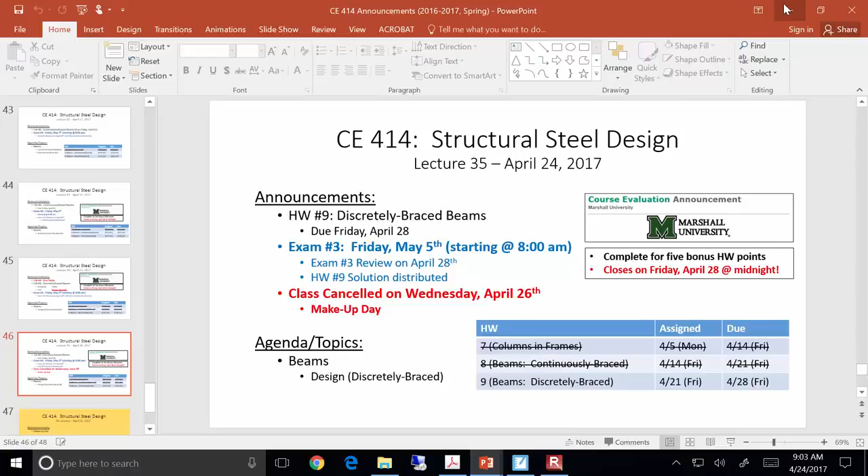Okay, so before we get back into our final example, or what is essentially our final example, I want to briefly go through the solution for homework 8. If you just came in, I was handing out homework 8s earlier. I can hand yours out after class, so if you don't have yours, don't worry. Just come see me after class.

1, 2, 3, 4. 1, 2, 3, 4, 5, 6, 7, 8. There's that. And then there's that. Okay.

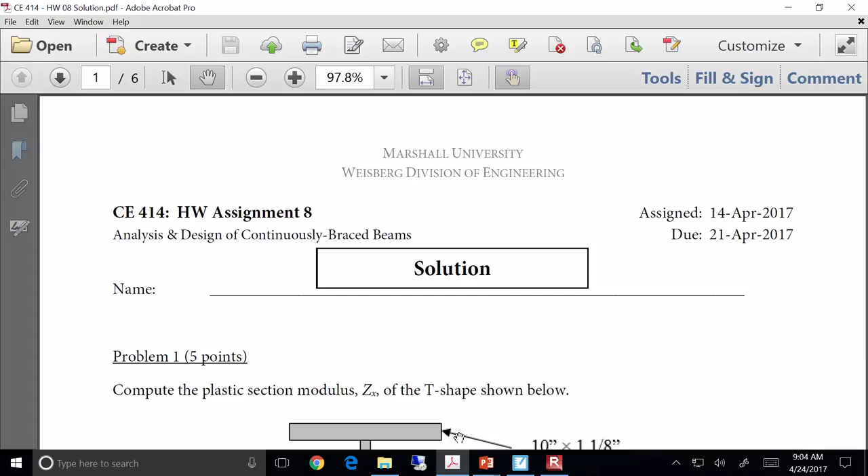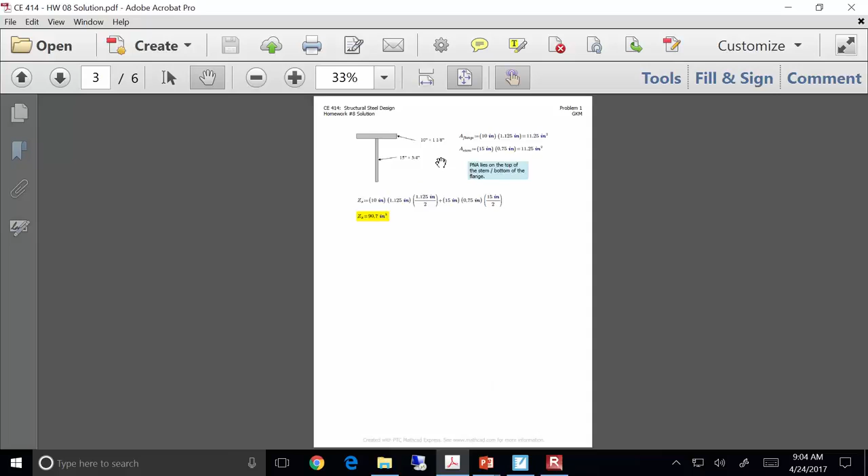So on this particular homework assignment, I think it was a pretty straightforward assignment. The one thing that probably gave everybody some hiccups was either the algebra on problem 2, or some of the load distribution stuff on problem 3. So let me go through problem 1 first. I think problem 1 was a little bit of a trick question, but if you look, the area of the flange was 11.25 square inches, and the area of the stem was also 11.25 square inches.

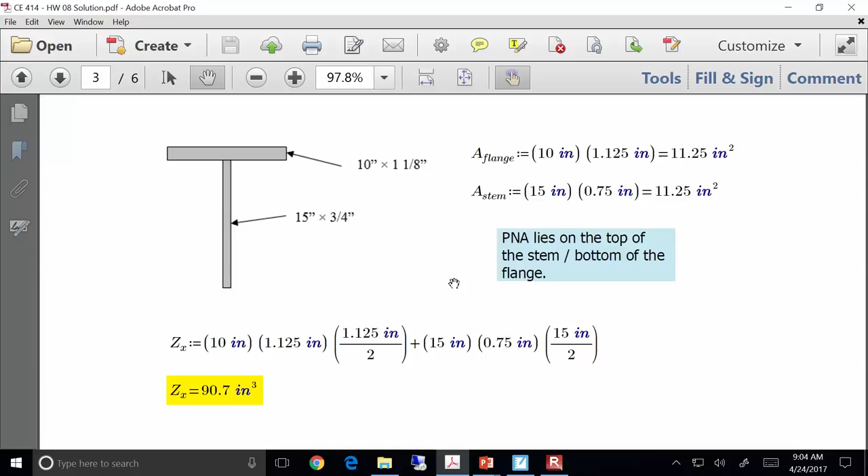So where's the plastic neutral axis? It's right there, right where the two points meet. So literally just taking moments about that point, you should have gotten a ZX of about 90.7 cubic inches.

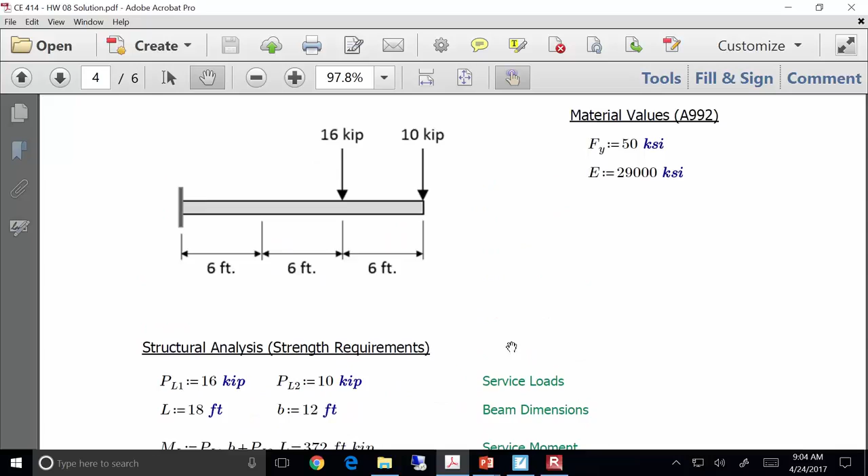And that's about it. On problem 2, let me show you what I did. So first off, for the moment, it's literally just each point load times its distance from the support. So you should have got a factored moment of 595.2 foot kips. Keep in mind your moment needs to be factored. For deflections, though, you do not apply load factors.

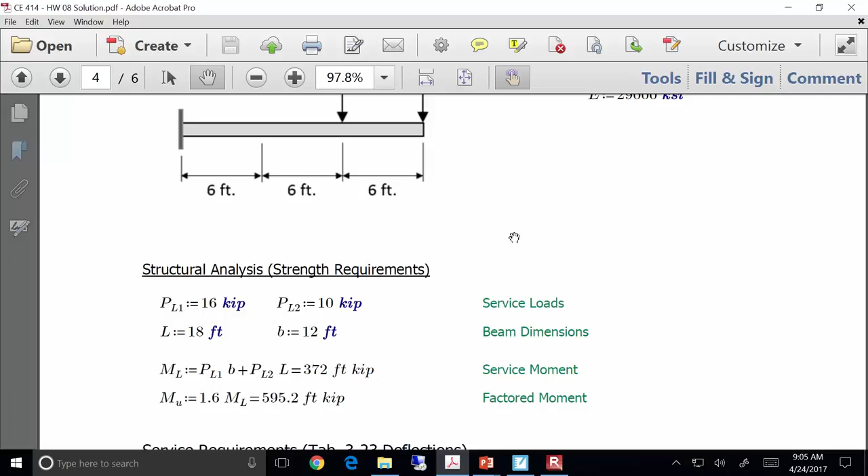Now, this is how I did it. Let me show you something. Okay, watch this. I think this makes the algebra a little easier, so I want everybody to pay attention to this. This is the deflection for the first live load, the one that's not on the very end, the 16 kips. This is the formula for the deflection for the 16 kips. Now, it's a bunch of junk, but it's a function of Ix, and you're trying to solve for Ix.

So watch this. If I factor out Ix, I get this pile of junk times 1 over Ix. Is everybody okay with that? So if I calculate all of this, I get about 961, and that's inches to the 5th, because if you divide that by a moment of inertia, that's where your inches comes into play.

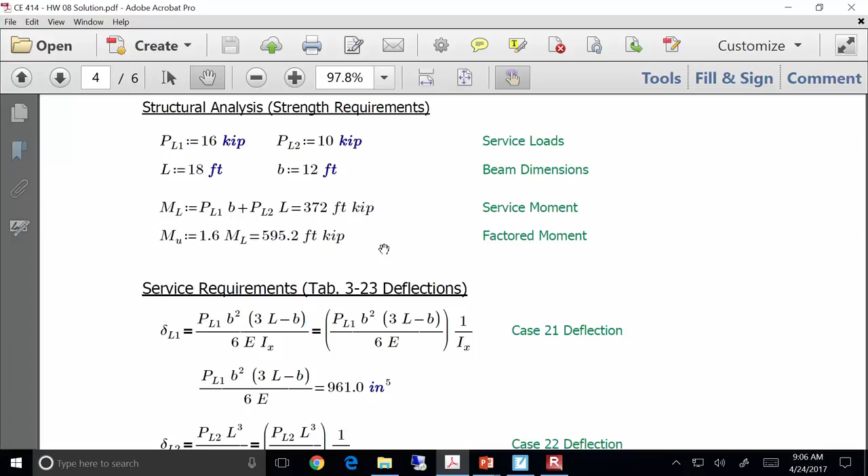For case 22, for that point load deflection at the end, that's where I get PL cubed over 3EI, and I get this. So if I add these two up, it's essentially just this over Ix plus that over Ix. So add those two up, and your maximum deflection has to be less than or equal to that over Ix. Just solve for Ix, and you get about 5,887. I think that's a lot easier, a lot less algebra.

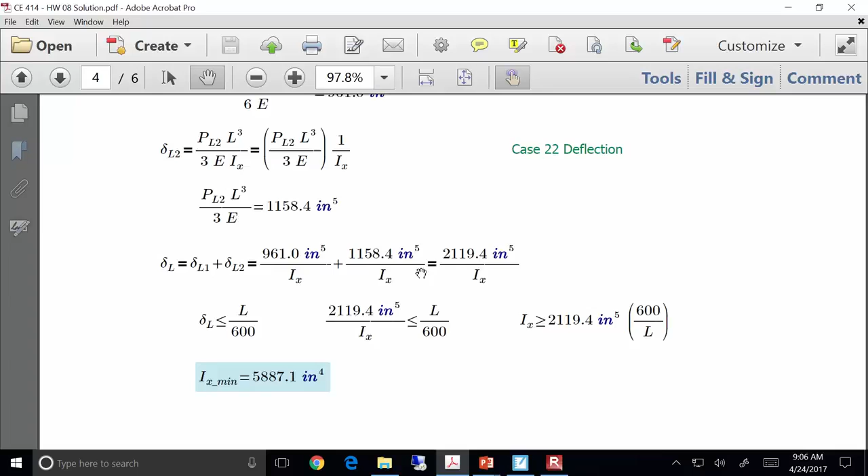So when you go into member selection, you have to select a member that has a maximum moment capacity of 595 foot kips and a moment of inertia of 5887. Now, if you select based off the ZX charts, you can select a 21 by 68, and it has enough moment capacity, but it doesn't have enough of a required moment of inertia.

So you go to table 3.3, pick the first section that works, which is the W33 by 118, then go back and check its capacity, and you've got more than enough. So your answer should have been a W33 by 118.

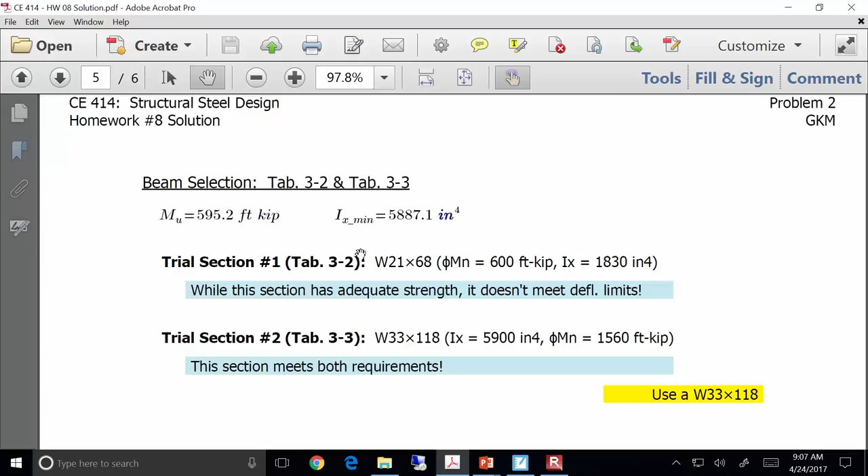As for problem 3, okay, so here's the problem. Now, unit weight of concrete is 150 pounds per cubic foot, or 0.15 kips per cubic foot. So let's take a look at the structural analysis. So first up, we've got the assumed beam self-weight of 100 pounds per foot.

Now, the area, I think we've discussed this in concrete design, and I know for those of you that haven't had concrete design in a while, you have done this. To determine the self-weight of that slab, you take the unit weight times the area, okay?

So what's the area of the slab? Well, it's the thickness times the tributary width. The tributary width is 8 feet. So 8 feet times 5 inches, you should have gotten 3.33 square feet. So gamma times the area will give you a dead load. So the slab weighs 500 pounds per foot.

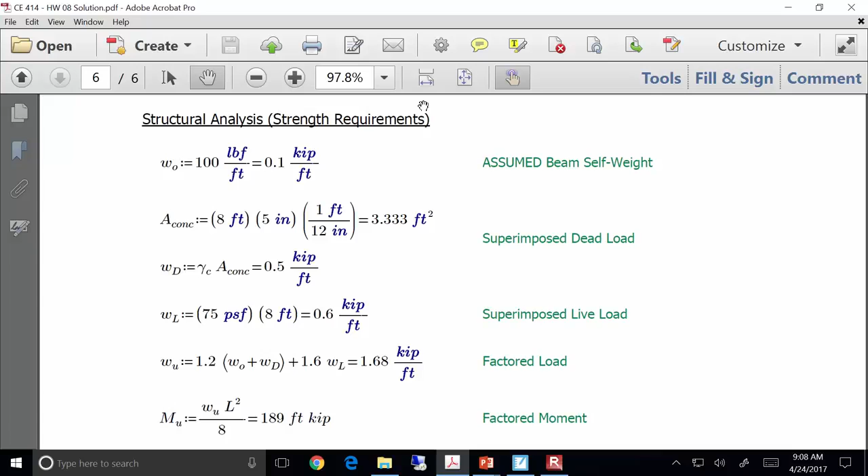The beam weighs 100 pounds per foot. So 1.2 dead plus 1.6 live, you should have got a factored load of about 1.68 kips per foot. Again, for your live load, just take the pressure load times the tributary width. So your moment should have been WL squared over 8. That was 189 foot kips.

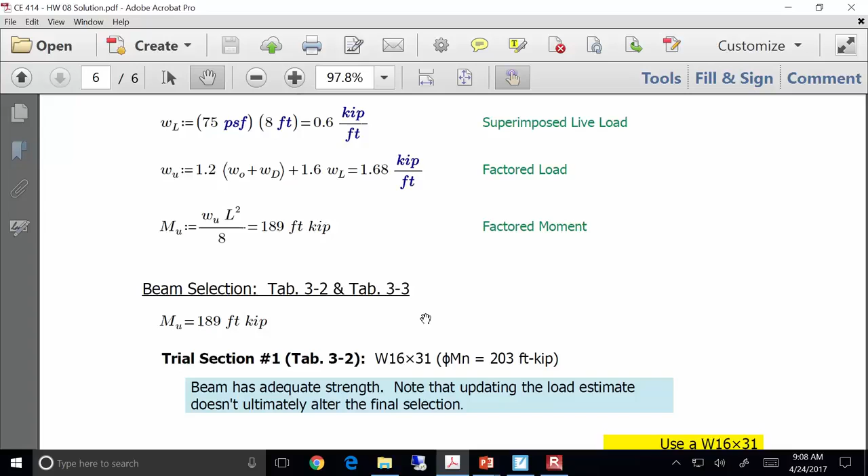So selecting a section, you should have gotten W16 by 31. It has adequate strength, and if you go back and update the load estimate, because this beam is lighter, you still don't get economy. If you remember, on one of the examples we did in class, we assumed a beam self-weight that was heavier, so we went back and updated the moments, and we found that we could actually pick a smaller section. That isn't the case here. It ends up still being the 16 by 31. So the 16 by 31 is your answer.

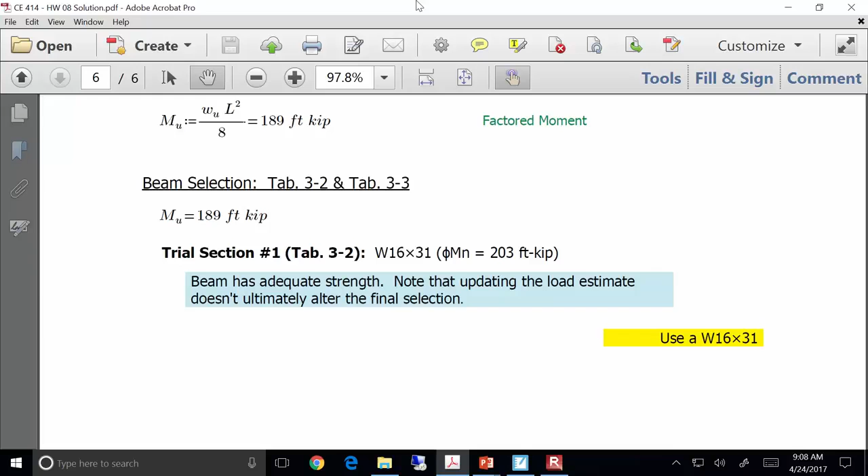Anybody have any questions on that? Yes. Yes.

However you get that, whatever you feel comfortable with. I mean, there's probably 7 or 8 different ways of doing that problem that are all correct. It's really more about what you're most comfortable with. Some of you are going to be more comfortable just hitting solve on your calculators. Some of you aren't. I recommend just doing what's comfortable, honestly. I'll say this.

This problem is more, I would say, computationally intense than what you would see on a final. I'm not an algebra guy on the final. That's not what I'm trying to get you all to do. I'm trying to get you all to do the structural design. So this was more intense than what you would get on the final. Sound good? Any questions? Okay. All right.

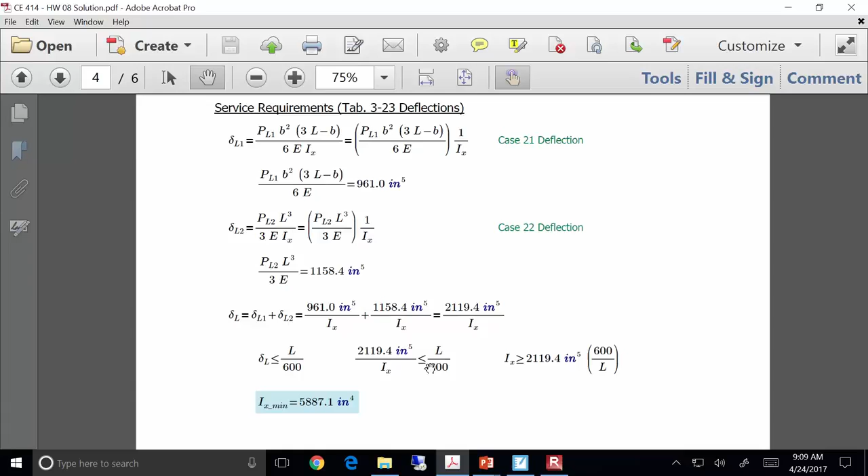If that's the case, then let's get into, let's sort of finish out our final example for the semester, which is this one. So let's just get back into the swing of things and make sure everybody's clear on where we're at and where we're headed.

So if you recall, we were discussing discretely braced beams as opposed to continuously braced beams. We know that unlike continuously braced beams, discretely braced beams want to buckle, okay? And their buckling capacity is a function of 2 things: how far apart your braces are, and your moment gradient. Assuming you've got a shape and you know all the material properties, you need to know how far apart your braces are and what your CB value is.

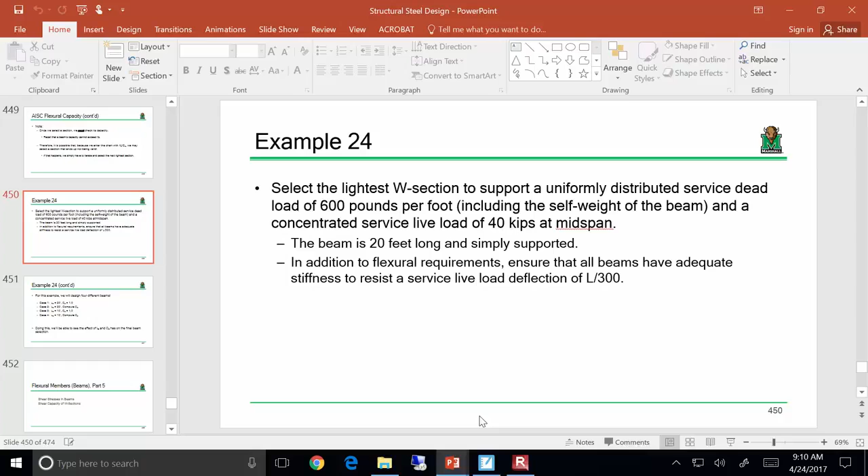So we're doing this example 24, where we're doing a fair amount of design, and the idea is that I want to give you all a lot of practice on determining whether or not a given section has adequate capacity. So my big goal is that you all understand how to navigate the beam charts. Now, we did example, or case 1, where we had CB equals 1, and then we looked up a section, and it was pretty straightforward. And that's really what case 1 was all about: just trying to ensure that you all can navigate the beam charts.

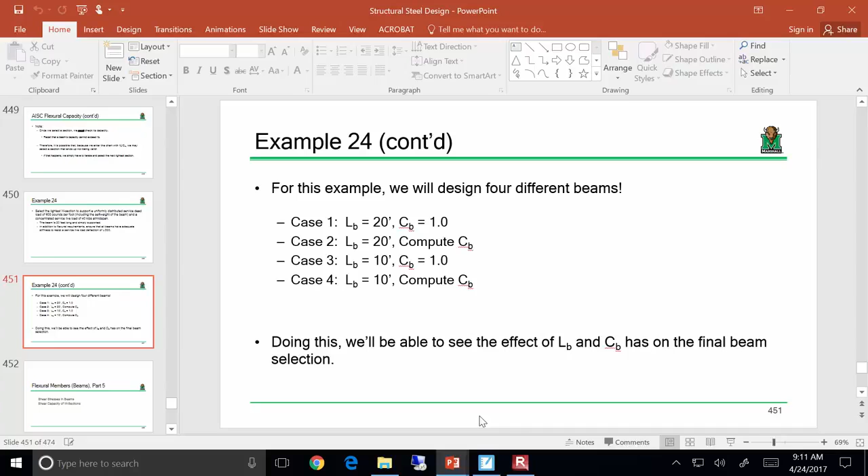Case 2 was a little more involved. We had to compute CB and then adjust our moments accordingly. So let me go back to the example problem. So here was the example problem. Let me go back one.

So here's case one. We have a CB of 1, so we just calculated our Mu, got 356 foot kips, solved, and we got a W16 by 67.

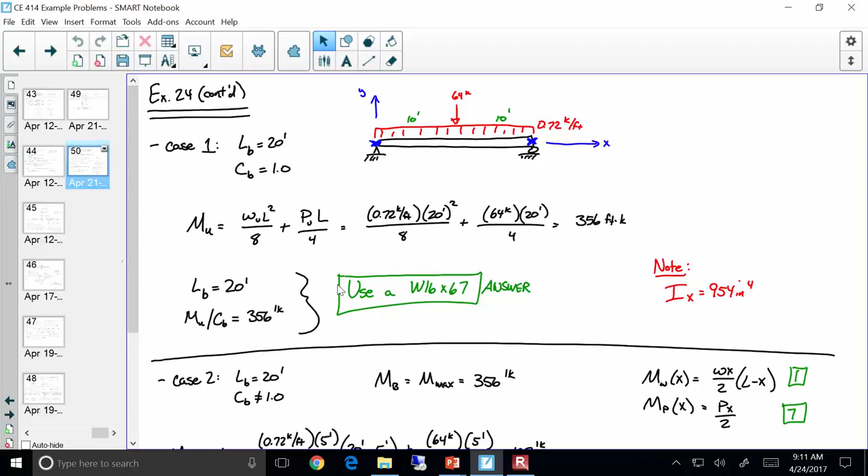Now for case two was a little more laborious because we had to go through and compute MA and MC. We knew MB and MMax were the 356 foot kips, but MA and MC we had to compute, using these expressions here.

Okay with that? Now we got a CB value of about 1.295. So we divided that out. We got an MU over CB of about 275 and an LB of 20, and we got a trial shape of a W14 by 61.

Was everybody okay with being able to locate that W14 by 61? Everybody okay with that? Okay.

Now, I say that's a trial shape for a very specific reason. In order to find this shape within the manual, we adjusted our moments by CB. As you know, whatever CB is, it doesn't matter - your capacity is cut off at MP. So it's very possible we could get what I'd describe as a false positive - a member that looks good but actually isn't.

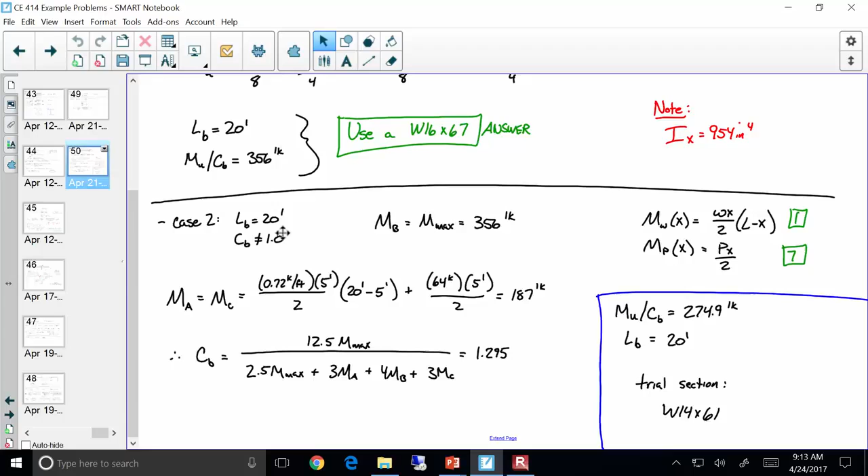So whenever you have a CB that's not 1 or greater than 1, you need to go through and check your section. So this is where we left off last time. Let's go through and analyze this shape - a W14 by 61. So what we need to do is go to the ZX tables and look up some properties.

For a W14 by 61. Now, it is very possible that's not a bold shape, and that's fine because the bold shapes are based solely off of ZX, but in the buckling realm, that might not match.

So let's start off - has everybody been able to find the W14 by 61? Is it a bold section or not? No, okay - again, that's very possible. So what page is everybody on? 325, okay, so you're on the fourth group down.

Now, the first thing we need in order to analyze this section is LP and LR. So what is LP and LR for this section going to be? Feet. And LR is...

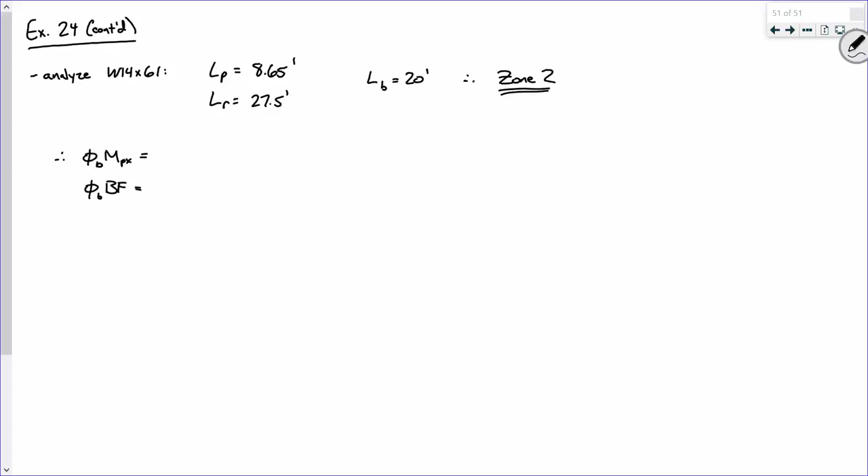And what's phi BF? Okay, everybody okay on that?

Now, I want to make an observation that might not make a whole lot of sense right now, but it will later. Okay, so phi MP is 383, right? What is our maximum moment, Mu, for this section? So it was 356, right? Mu is 356, right? So phi MP is bigger than that, right? I want you to just keep that in the back of your head, okay?

Now, while we're at it, before we do any other math, just keep that relationship in the back of your head. Now, what is Ix for this section?

And are we okay with that value? Yes, because that value is larger than our Ix min. So is everybody okay with that?

I know it's been a while, but everybody good? Remember, what was our Ix min? 490 something, yeah, okay.

All right, so in order to analyze this section, in order to determine phi Mn, it is the minimum of the following quantities: CB times phi MP minus phi BF times LB minus LP, or phi MP.

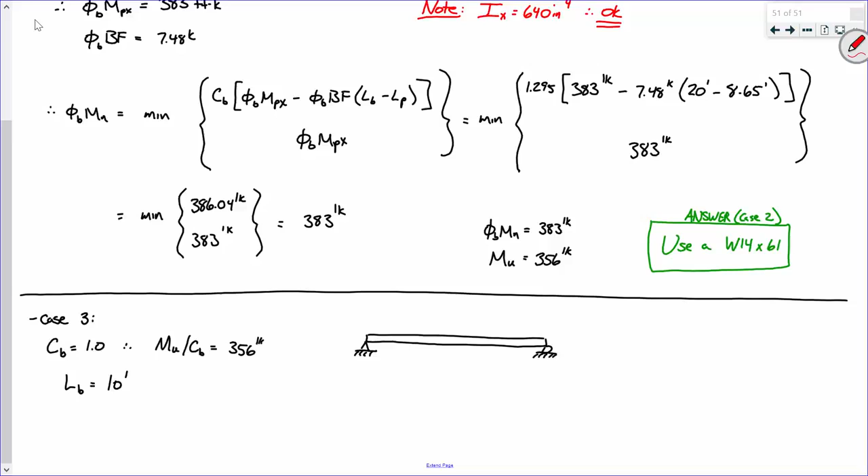This is important. So here was our beam before. We had this. Excuse me, we had this. And we had this, right? And this was 10 feet, and this was 10 feet. This was WU, this was PU. All right, everybody okay with that?

Now, last time, all we had was a brace here and a brace here, right? So last time, what we had was MA, MB, MC, and then M max happened to be right there, right? Now we have a brace right there. So is that center point still MB? No. Now what we're going to have is MA, MB, MC, and M max. Everybody see that? Yes.

For case 4, I'm making the point for later. No, I know what you're saying, but my point is later, I want you all to understand that we can't use, like when we do case 4, we can't use the C sub B value from before. We can't use that, what was it, 1.295? We can't use that from before because we have a different spacing configuration. We're going to have to go back to those moment expressions that we calculated before and do a little bit more work.

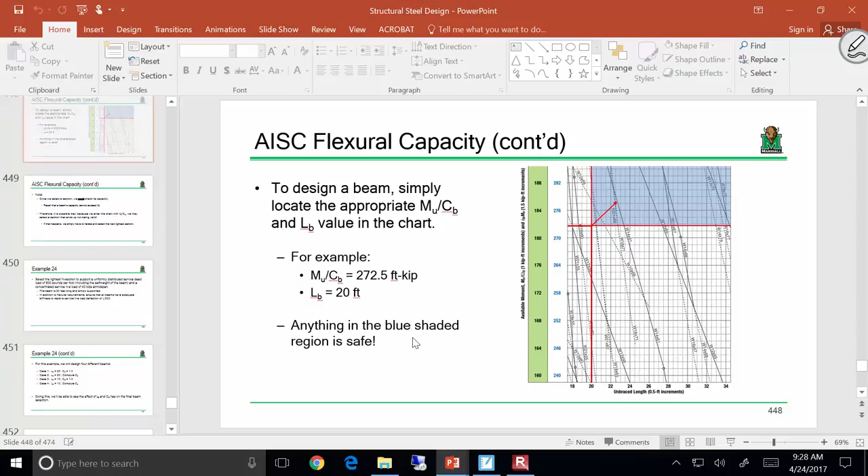I'd say it really doesn't matter, you can go either way. Really what you're trying to do is this - let me show you, it'd be easier if I pulled up the image. So you're finding that particular point, and anything in the blue region is safe, indicating a section with larger moment capacity and larger unbraced length. So let's say here's your point.

Now can you see that's a W14 by 61? Whether you go right and find the W14 by 61 or go up, it's still going to be the same line. I would argue doing it that way.

The reason why is because more than likely you're going to have the shortest distance. It's possible that on some of these charts, and this can get a little frustrating, you find your point and go like that, but if you go up you have to go to the previous page, so you're having to go to different pages to find your section. So I would just do your best to find the shortest distance to your nearest section without turning the page. Sometimes you have to, there's no other way around it. Does that answer your question? Yeah.

It's possible but rare. Let me say this - what happens in case 4 might throw a new wrinkle into the mix, but we'll get to that in a second. Just bear with me on that.

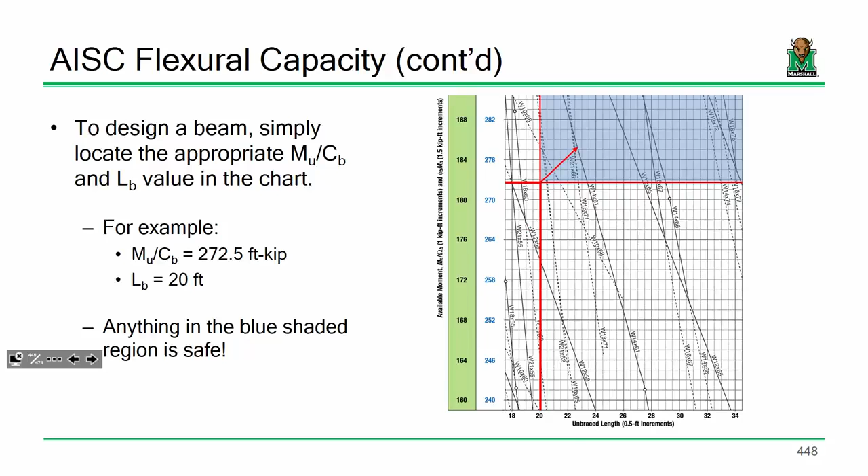Now what was the moment of inertia of this section, the W18 by 55? Did anybody look that up? 890. So I'll put a note: IX is 890 inches to the 4th. That's okay, right? Because remember, no matter what, we had to pick a section that was over 490... 497. Okay, all right, now look at this.

What happened? It got deeper, but it got lighter. Now why? Well, because we threw another brace in there. Throwing another brace in there means increased buckling capacity - you're taking that unbraced length and making it shorter. It's a lot like columns - you take a column and make it shorter, it gets stronger. Same idea, okay? Make sense?

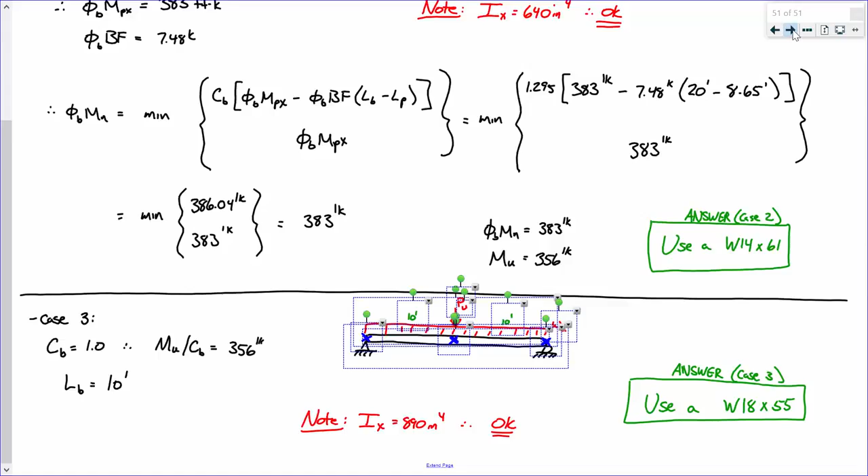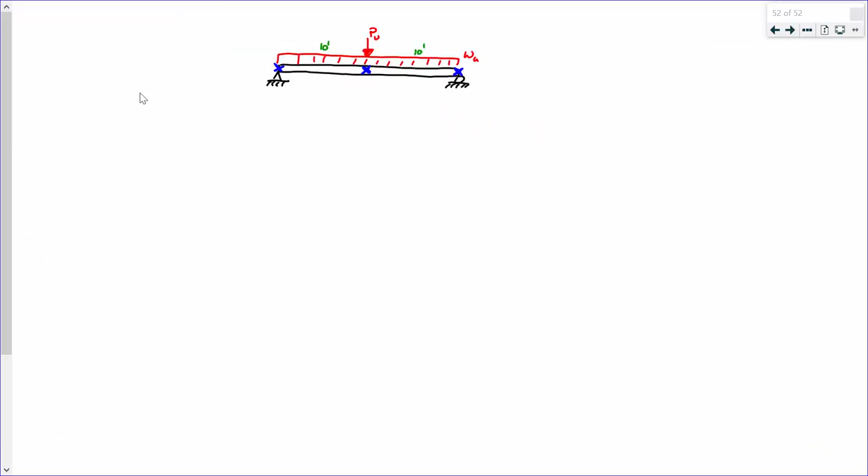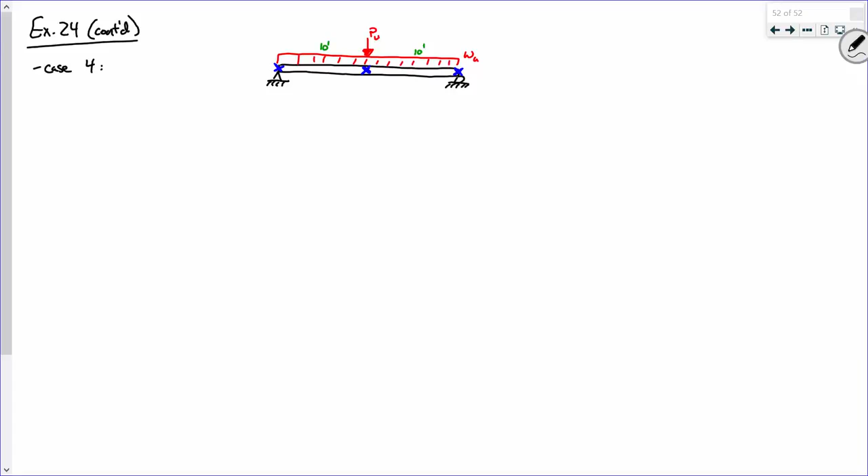Any questions? All right, case 4 is going to get interesting. I'm lazy, so I'm going to redraw this - I'm going to copy this. Okay, I mean for that to happen. Now I'm lazy, so I want to reduce the amount of math that I have to do altogether.

I'm not going to be able to get away from doing some. Now, would you agree that the moment diagram is probably going to look something about like this? It's going to have some roundedness to it, it's going to have a point to it, something about like that. Would you agree with that?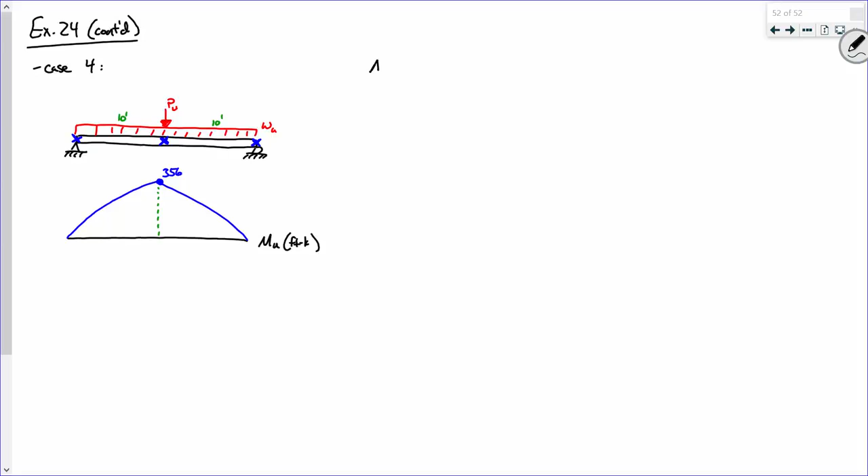Now what is this top value right there? And what is that? We have computed that value already - what is it? 356. So we'll say that this is the MU diagram in foot kips. All right, sound good? So would you agree that for this segment, M max is 356 foot kips? Would you agree with that? Okay, all right.

Another thing, let me go ahead and do this. Before, we had MA, MB, MC, and M max because the entire beam was unbraced. Now each half of the beam is unbraced, so I'm proposing that the moments we need to compute are like this: MA, MB, MC, M max. Is everybody okay with that?

Now I'm lazy - have we computed any of those values previously? MB - before that was MA, right? Or MC, right? Everybody okay with that? So what did we get last time? What value did we get? Anybody have a value? 187. All right, everybody okay with this?

Now just so everybody's aware of a couple things, our factored load was 0.72 kips per foot, and our point load factored was 64 kips, right? Everybody okay with that? And another thing, our function for the distributed load was Wx over 2 times L minus X, and our function for the point load was Px over 2. Make sense?

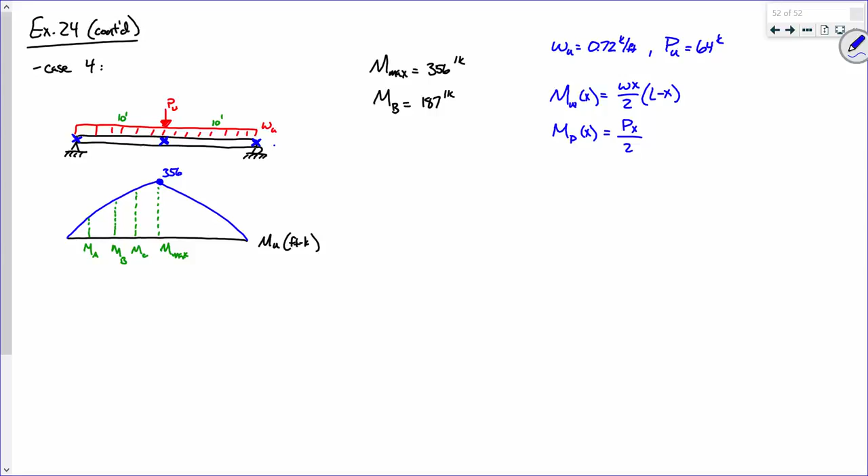So if I throw a coordinate system on here like before, this is X and this is Y. If I want to compute MA, what value do I plug in for X? MA... 2.5 feet. Does everybody see that? If I want to calculate MC, I plug in 7.5, right? I don't need to do MB because I already did that previously with 5 feet, and I don't need to do M max because that's 10 feet. Everybody okay with that? All right, so let's take care of MA, and then I'll let you all do MC on your own and tell me what you get.

So MA is going to be 0.72 kips per foot times 2.5 feet over 2 times 20 feet minus 2.5 feet, plus 64 kips times 2.5 feet over 2. All right.

So what did we get for MA? 95.75 foot kips. Do I have a second on that? All right. And MC is just going to be the same thing, but with 7.5 feet. So tell me what you get for that. 273.75. Do I have a second on that?

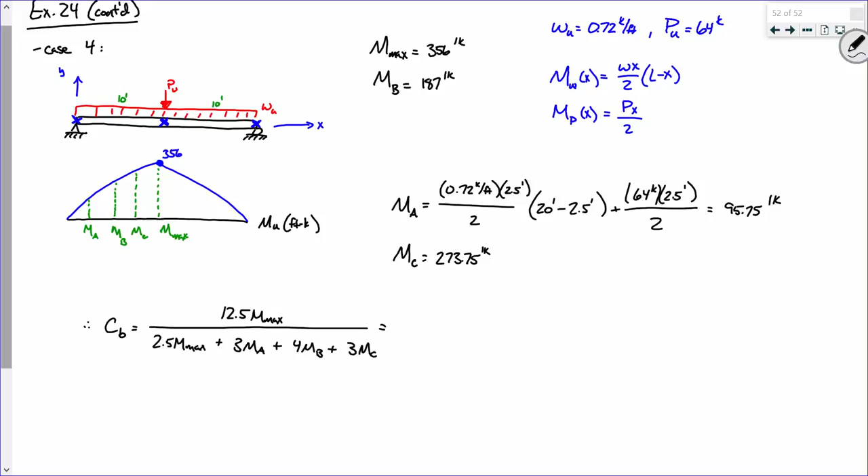All right, now before we start looking stuff up in the charts, I'm going to need some help with some things. You're going to like this. So let's start off with this: what is MU over CB? 356 divided by 1.62, what do we get? 219 point... we'll just say 0.8, because we're going to use this to look it up in the chart. That's about as good as we can get.

Now, what's LB? 10 feet. Okay, bless you.

All right, now this is what we're going to do. Everybody, we'll say from Tyler and Julius this way, I want you looking in the beam charts. Everybody from Kyle in this way, I want you looking in the ZX charts. So if you're Kyle in this way, go to the ZX table. And if you're at the beam charts, or if you're Tyler and Julius, go to the beam charts. You're going to like this.

Now, let's be clear, what is our maximum moment? I'm going to put it on the board here. What's MU?

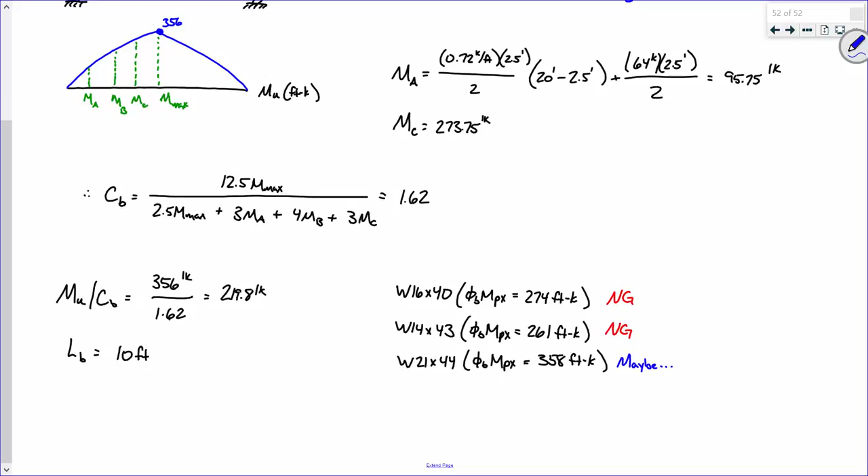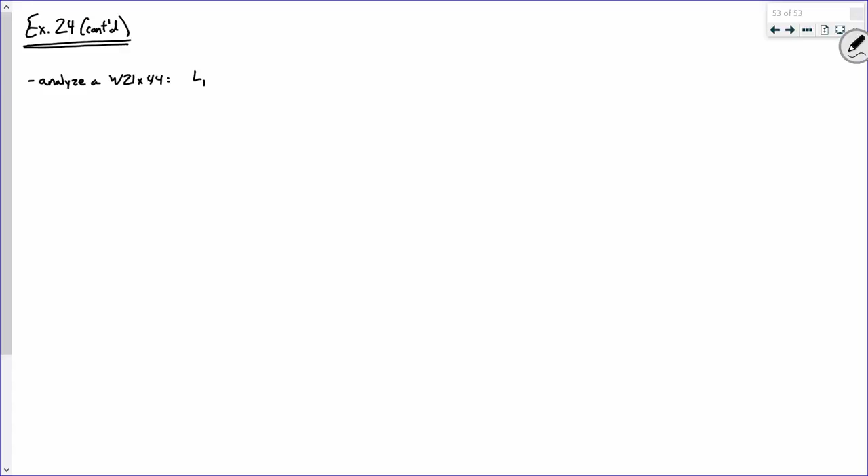All right, let's analyze. A W21 by 44. To do the analysis, we do the same thing as before. The first thing we need to check is LP and LR. So what's LP and LR for this shape? Again, what zone are we in?

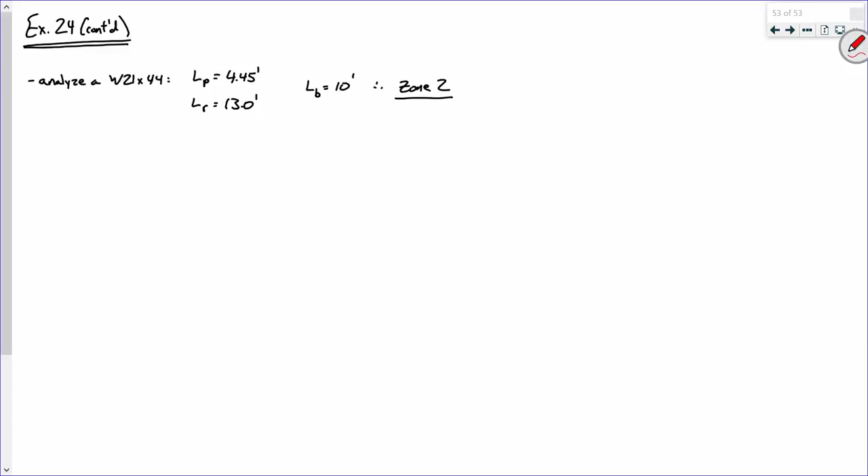Yeah, because LB is 10 feet, so we're in zone 2. And again, in design mode, that will happen more often than not. Now, while we're at it, what is the moment of inertia?

So that's just something to check at the very end just to make sure you're good. That's the only deflection check we're doing on this entire problem. A whole lot easier than concrete design, right? Deflections were a

thing there. Okay, so we need two more values. We need a phi MP, which we already looked up - that was 358. And we need a phi BF. What was phi BF, or what is it for this section? 11.1?

I have a different value - that's 16.8 kips. Is your sheet saying that? Oh, okay. Oh, yep, okay.

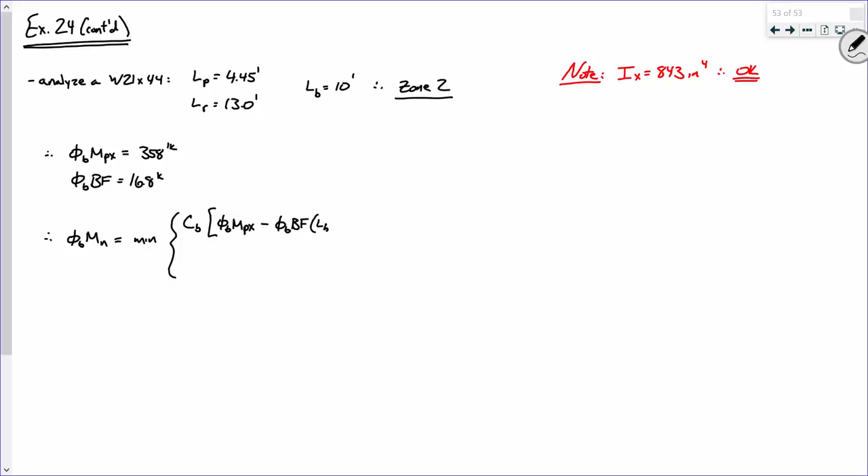So, because we're in zone 2, our capacity is the minimum of either MP or that linear fit - that's C sub B times phi MP minus phi BF times the quantity LB minus LP, or phi MPX. Now again, your C sub B value is 1.62. We're not using that value from before, because that C sub B represented a different bracing scenario. So it's just something to keep in mind.

So it's 10 feet minus 4.45 feet, and then 358 foot-kips.

So it's the minimum of 358 and something... we really don't need a decimal. So the capacity is 358 foot-kips.

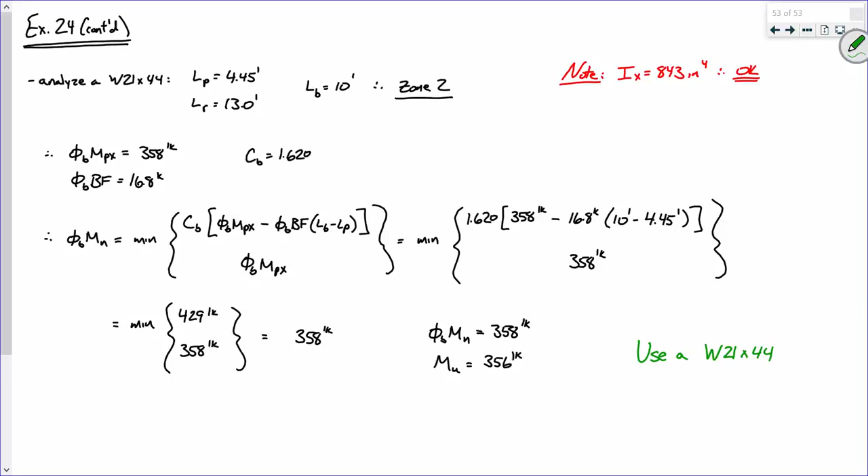So look at this - again, it got lighter. All right, does that make sense?

Okay, here's what I'm going to do. Shear doesn't really matter - you can look at the handout I gave you, but it really doesn't matter, look at the numbers. I think we've done enough beam examples in this class to know that for beams in buildings, shear just doesn't really matter. We calculate a load of 20 kips and end up with a capacity of 120 kips. If you want, I'd be happy to post a video on that, but there's really no point talking about it in class.